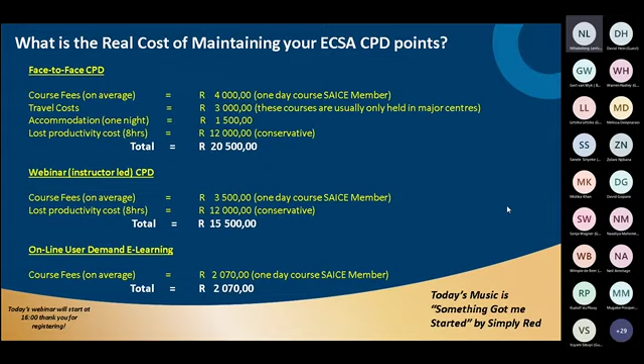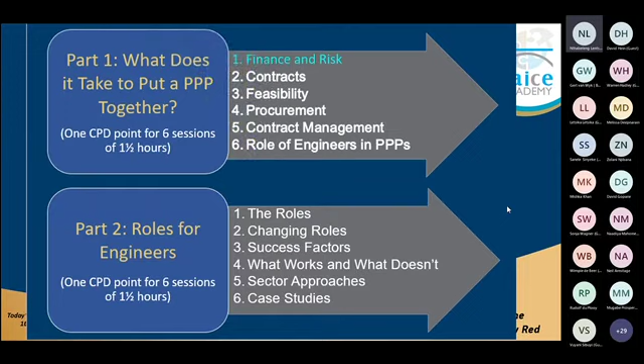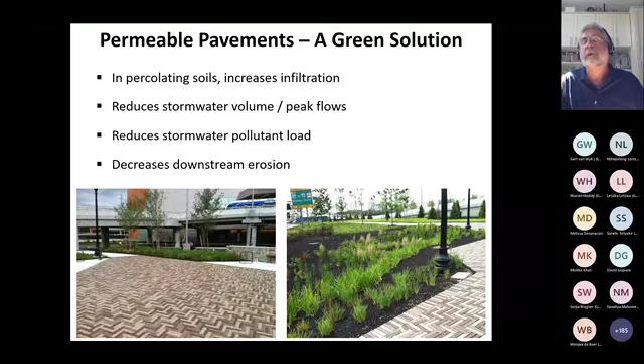That photograph you see there is from Boston Logan Airport in Massachusetts in the United States, where they have a number of different systems of permeable pavements around the airport, as well as internal to the airport, in their road infrastructure and parking systems.

It reduces combined sewer overflows. In many areas in North America, we have older areas where we've combined sanitary and stormwater systems, so when it rains, all kinds of nasty things get floating down into the lakes and rivers. We can try to separate those things from happening.

We can help support tree growth, because a permeable pavement system doesn't have the same dense aggregate materials that we would normally use with pavements, so tree roots are able to grow into the spaces a little easier and have direct access to water. A couple of my projects in the US and California have shown improved tree growth and tree canopies, and therefore improved oxygen generation and things like that.

Improving the character of the neighborhood - lots of signs go up talking about permeable pavement systems and what we're doing to help infiltrate water, and all of those things are looked upon very positively.

General components of the paper - I should mention briefly how I'm going to go through this. I'm going to give a basic introduction of permeable pavements; some of you may have seen some of this already. I'm going to get into a little bit of the design aspects, and talk about a design application called Permeable Design Pro that has recently been developed for use now in South Africa. Then I'll talk about a little bit of construction and maintenance activity - all the key components to help ensure success in designing and building permeable pavement systems.

Basic components of them - they're like any other pavement, except that we're using different materials as support for the pavement structure and the loads we apply to them. We are using open graded aggregate materials, and sometimes other things like plastic boxes to create a larger ability to control water in the pavement structure. We use open graded base and sub base, and open graded bedding layers for the pavers. The pavers themselves, while solid concrete materials like we'd build any other paver, have wider joints, and we no longer put sand in the joints.

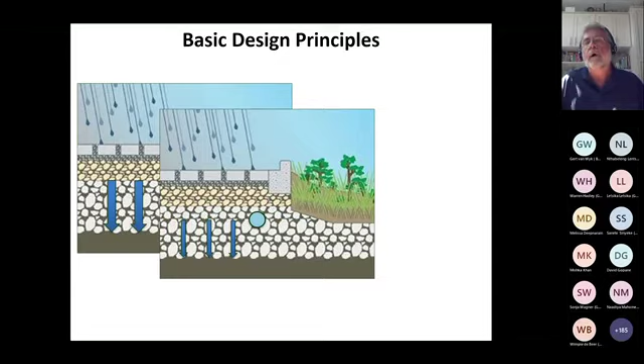At some point we don't want it to overflow the pavement, so we put in a drainage system that allows water to be removed if it can't get into the ground system. This is a very popular design process in areas where I am. The water in the pavement builds up to an outlet, and that outlet takes the water to a stormwater pond, a ditch system, or wherever.

The last design process is basically a no infiltration design. In this design, we cover the entire permeable pavement system in an impermeable liner that will not allow water to go through it. There are two primary uses of this type of system.

One is to save water and store it. We keep it in the pavement structure, typically putting in a cistern or some other larger storage area. We move the water into that cistern, then pump it out and use it as gray water, plant water, or for other sources. Some places are actually storing that water for reuse for human consumption.

The water is then cleaned, of course, in areas that have very small amounts of rainfall. The second use is primarily for situations where we have gray or brownfield developments, where we're redeveloping something that may have contaminants in the groundwater, and we don't want to add water going through that.

So we're basically separating the permeable pavement system from the subgrade below, so we're not increasing flow that would move some of those contaminants to another location. I see a lot of these in brownfield developments in the UK, for example.

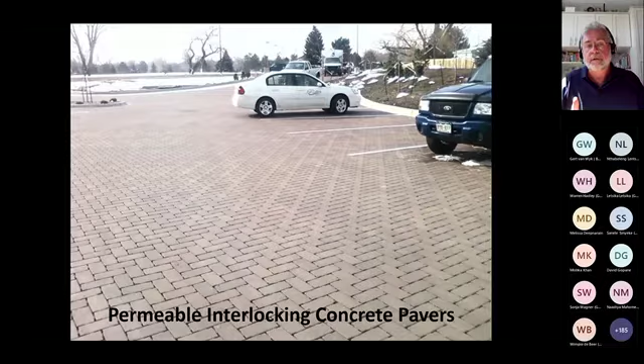We see this used in parking areas and roadways, especially in Europe, which has had much more experience with permeable pavements than we have in North America. We're starting to see a lot more roads in North America being built with this.

There are major advantages in terms of construction, because we no longer have drainage systems under the roadway with piping going to catch basins and pipe systems removing water to a stormwater pond, for example. Construction is easier to facilitate, and we don't have trenches that could potentially settle, so contractors love doing this.

We basically infiltrate all of the water through the pavement and then deal with it once it's in there, whether we infiltrate it or take it someplace else. Roadways and alleyways, as you see here, are a very common use.

This is a project I did back in 2015 in California, in the San Francisco Bay. This was an existing roadway that we reconstructed. We kept the curbs and sidewalks, and excavated the old roadway out of there.

We prepared some berms, which I'll show you later, to control water because this is on a slope. And then we built a permeable pavement system. This was primarily done by this particular city in Berkeley, California to improve water quality potentially in the San Francisco Bay Area. A small contribution at the beginning, but as you build more and more, you make larger contributions.

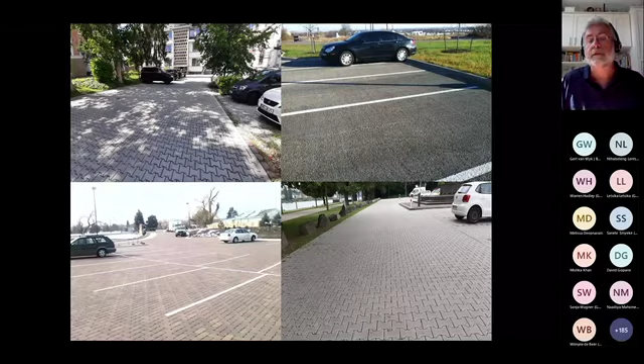The top right is a porous asphalt system, again close to where I live. This is from a botanical garden near where I live, doing sidewalks and alleyways. The left side is from Florida in the U.S., Richmond Virginia, and this is in Longmont, Colorado. The one on the right side has been there for 10-plus years.

I was involved in Colorado Springs. They have regular pavers for the sidewalks, and permeable pavers between the tree pits, so we get water infiltration to water the trees, which is also quite good for the trees. Driveways and houses -- we get credits on our water bills when we have permeable driveways in our house. We get penalized for having hard surfaces.

The roof of my house, for example, I'm penalized. All of the water that lands on the roof goes down the downspouts into an underground infiltration bed beneath the foundation of my house, because we get all our water from the groundwater. So no water leaves my property.

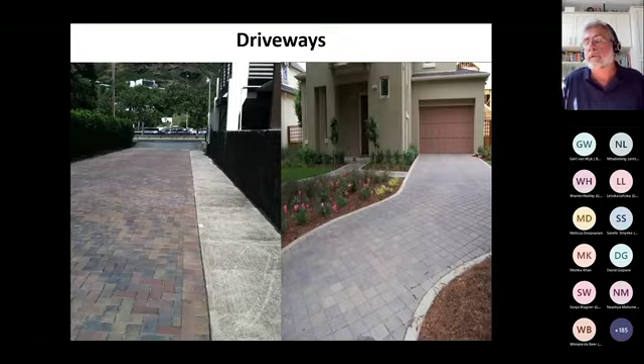So we get credits when we have permeable driveways or sidewalks or decks behind the house. I've also got water barrels to reduce the amount of fresh water we use. Those are very common uses.

Where my wife takes the cat, this is a veterinary place. The driveways -- all of the areas around this property drain onto the permeable driveway and then get infiltrated into the ground. We see them at schools and universities too.

This is from Portland, Oregon. It's been there for 12, 14 years now, I think. I was involved originally when this was constructed a long time ago. So lots of applications in lots of different places around the world, certainly.

Keys to a successful project. Some of the things I'll talk about are ensuring we have success in building our permeable pavement system. Ultimately, it starts with carefully considering the conditions of our site, potential limitations, things we can use to remediate, and potential risks associated with building a permeable pavement and having it not function properly.

We do two types of design. We do pavement design like we normally would to handle vehicular traffic, very similar to conventional pavements. And then we have hydrologic design, combining the water flow -- how do we get water into the pavement? Where is it coming from? How do I move it through the pavement and into the ground? Do I get it into piping systems, or move it somewhere else? All of these things are very important at the design stage to ensure success.

We need very clear, precise specifications. All of the industries typically have some guidance in terms of specifications for permeable pavement systems -- those that build asphalt, concrete, pavers, bricks, or grids all have some guidance. Those have been developed over many years of experience, trials, and improvements in how we build them, so it's really important to have a good set of rules for the contractor to follow.

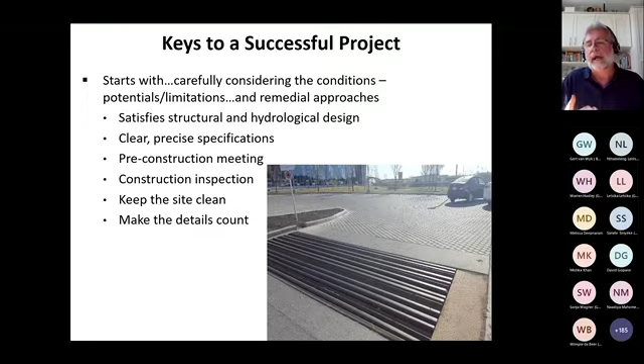Having proper construction inspection, like any pavement, is important. Keeping the site clean, I've already mentioned, and ultimately it's the little details that really count to ensure we're going to have success. Some of the basics of permeable pavements.

Number one is that we have pavers that can be constructed of various thicknesses - 6, 8, 10, 12 centimeter, even bigger. 6 centimeter pavers are something we only use for pedestrian applications; we will never drive a vehicle across a 6 centimeter paver. 8 centimeter is our minimum recommended thickness for ability to develop shear resistance between the pavers so that loading is transferred from one to another, and also for structural capacity. So typically 8 centimeter minimum for vehicular pavements.

David, we've lost your sound. Uh-oh, you hear me now? Better, yes, thank you. Okay, sorry, apologies.

45-degree herringbone is important for stability of the paving system itself. 90-degree herringbone possibly as well, but these are the patterns of pavements we've learned are more stable under vehicular traffic. There are so many different kinds of pavers, and different ones will provide a little bit different stability than others, but typically it's the laying pattern and the jointing that provides most of your structural capacity.

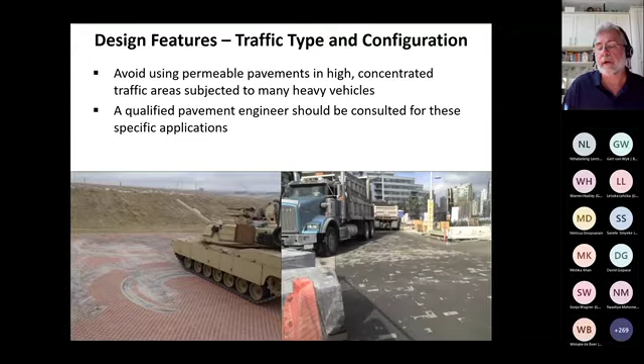Design features - we need to know about traffic type, configuration of the vehicles, what kind of vehicles we're designing for. Both pavements in the pictures - on the left is an M1A1 Abrams main battle tank pavement I designed in Colorado Springs; on the right is the Olympic Village in Vancouver. This one was built so construction traffic was using it at the end and we didn't like that, but ultimately they were late for the Olympics so we had to make some compromises. We design them for the intended traffic and what they are. Most permeable pavement systems are designed for light vehicles, occasional heavy vehicles - a garbage truck once in a while, a school bus - and those are relatively straightforward. If you're doing anything like these two photographs, find yourself a decent pavement engineer who's done this before and understands developing permeable pavement systems for heavy vehicular traffic.

So we want to prevent things from getting washed onto the pavement as much as possible, coming from trees above, potentially. Some of this stuff breaks down and might clog the joints, and then we have to do some maintenance to reinstate the permeable pavement system.

So site characteristics are really important to decide where and when you actually build the permeable system.

So for site design, this is the Environmental Water Resources Institute book from the American Society of Civil Engineers, called Permeable Pavements. I was the editor of that, and I'm currently a reviewer of the majority of the chapters as we update this book. It's got great guidance in it in terms of checklists, for every aspect of the design, construction, and maintenance activities.

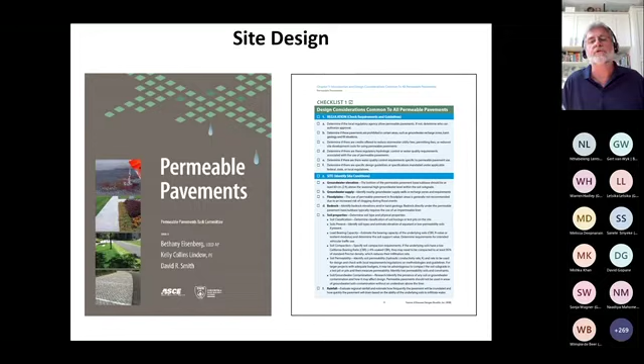For things like overall site characterization, we consider the location where we're doing this. Why are we doing this permeable pavement design? Are we doing it to clean water? Are we doing it to carry water away? Are we doing it to infiltrate water? What is surrounding our area? What is the hydraulic conductivity of the soils?

What kind of risks are we taking, and how do we at the design stage apply risk factors that discount the amount of infiltration into the ground, because we're expecting some contamination? We design for that right away up front, at square one—reducing the allowable infiltration into the ground. It will infiltrate faster until sometime 10 or 15 years from now when it may slow down. So we account for that.

Are we having water run off the surface? What kind of capacity do we have? How much water will pond on the surface, maybe in a very high storm? I'm doing some alleyway designs in Texas right now where it's fine for everything but a 100-year design storm, where we may have about 20 millimeters of water ponding on the surface for 40 minutes during a hurricane basically. We have criteria for all of this to make this happen. And then, how long does it take the water to drain out of the permeable system?

Geometrically, continuing with that: do we put in subdrain systems to carry water out? Do we target water quality enhancement? Do we detain the water for a longer time to let gravity filter out some of the contaminants potentially? We put sand filters in some of our permeable pavements to actually do what a water treatment plant would do, filtering contaminants out of the water stream, because we don't want them where the fish are. We'd rather have low-level contamination in the permeable pavement area than let it roll right into the cold water stream. And then we consider potential failure areas and mechanisms, like edge restraints and overloading due to heavier vehicles using the site.

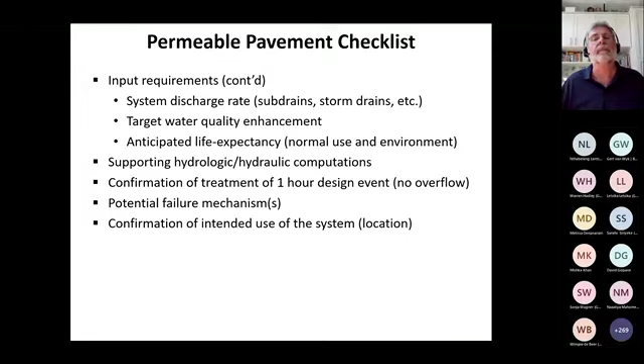Geometrically, we look at all kinds of elements related to the use potential of things like geotextiles, underdrains, or supplementary drainage features that take overflow on the pavement, for example.

Are we going to have subsurface detention of the water? How long are we going to detain it? Usually we design for 24, 48, 72 hours, so we'd like to empty the pavement within 72 hours. It may be different in an area with frequent rain versus very little rain, so all of these things are taken into account. And if you're in a frost area with cold, wet environments, we also need to do things to make sure we don't get frost heaving and things like that happening.

For subsoils, we do geotechnical work like you would with any regular pavement design, except we also include the hydraulic permeability of the subgrade material.

And then we'd like to know where the highest groundwater will be. We typically don't want the bottom of the permeable pavement system to be within 0.5 to 1 meter of the highest groundwater level we have. It kind of defeats the purpose of it.

So ultimately, all of these things are in these checklists. We have a bunch of decision factors. This comes from the ASCE standard, developed by a group of 20 hydrologists and 20 pavement engineers working together on the permeable pavement system and the manual that we have from ASCE.

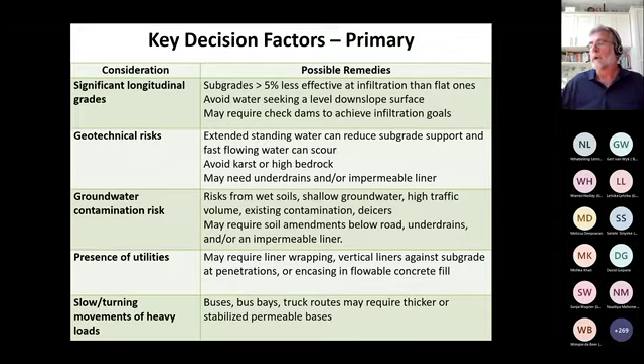So we consider things like longitudinal slope or transverse slope. We consider potential for contamination from spills, for example. Are utilities present near the pavement surface, and do we have to protect those from water? We look at volumes of water, multiple design storms, and multiple storm events that may be back to back.

Again, all of these things are dealt with at the design stage. Do we have complex geometric conditions, like water shedding off of a building roof, coming from a soccer field pitch, a parking area, or a non-permeable surface, et cetera. So lots of different considerations that we use.

And I mentioned depth of water table and chemical spills as well. We have tools for some of this that were developed as part of research programs I was involved in with the National Cooperative Highway Research Program in the United States. And so we have spreadsheets that are basically risk matrices.

And engineers like spreadsheets. So we develop criteria, we weight the criteria as to how it may positively or negatively affect the permeable pavement system, and then we rank it. We put criteria A, B, C, or low, medium, high, and we answer the questions, fill in the blanks, and at the bottom right, you get a go, no-go type approach.

So if it's red, it means don't do a permeable pavement here. If it's green, it says yep, do one here, no problem at all, the risks are low. And if it's yellow, it's, yeah, you could consider it, but maybe you should consider your risks.

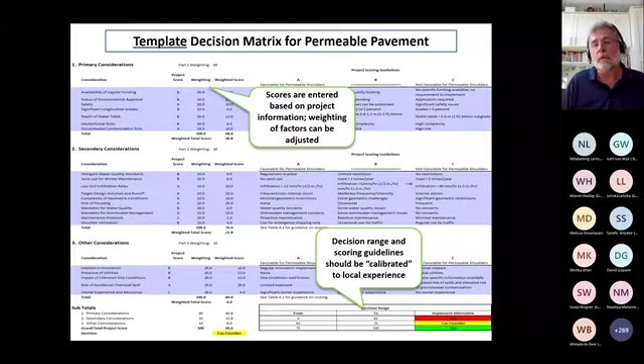So we look at potential sites, we evaluate them. The criteria is not always the same—it's different in a municipal environment than it would be in a recreational environment or something like that. So we look at things like underground utilities and when they were last replaced.

And some of the elements are the same as you'd do with any normal pavement design, but in some cases we want to make sure we're dealing with permeable situations. So we look at a variety of different road systems. This came from an actual project, and this Alston Way was the road that was built at the end of the day. It helps give logical criteria to evaluate risks associated with permeable pavement systems.

So let's get a little into the design aspects of this now—permeable pavement design. There's lots and lots of guidance related to permeable pavement design around the world. I've got some here from the US, New Zealand, the UK, Canada, some US states, industry associations like the Interlocking Concrete Pavement Institute, and ASCE. This has gotten substantial—I could give you pages and pages of these things related to permeable pavements. Many organizations on a state, municipal, or city level will have their own guidance related to permeable pavements as well, and conservation authorities too.

We have two sides of it. I'm going to go through the highlights of the design process here, and show you how we do it with the software application, Permeable Design Pro. So we have two sides of our design: on the left-hand side, we have a structural analysis, and that's very similar to what we would do for any pavement design.

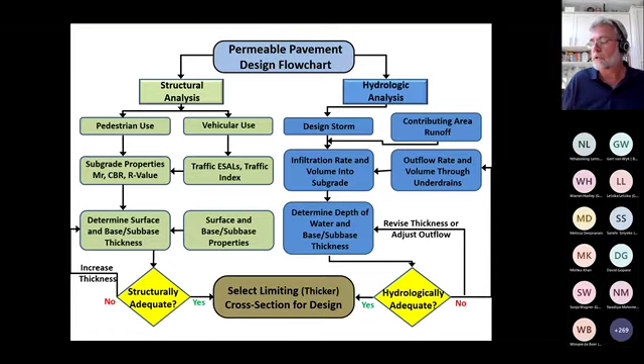The primary method used in North America is the AASHTO method, the American Association of State Highway and Transportation Officials. It has been the standard pavement design process used by most North American agencies and others around the world since the 1960s. That's being changed now towards mechanistic design, but we'll talk about that in a moment.

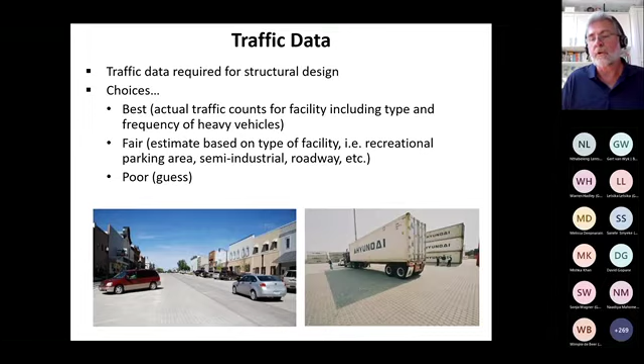So what does it need? It needs traffic data - we need to know what traffic is using our pavements. Basic information includes types of vehicles and the axle loads on the vehicles, how much weight is on the vehicle. Ultimately, the better the information you can get, the more precise the design can be.

A standard axle load is called an ESAL, equivalent single axle load, and it's not a linear relationship, it's a power 4 relationship, which allows me to convert the actual loads on the axles, whether at, below, or higher than the standard axle load, into a common design numerical value. That's what's called the ESALs, or the design ESALs of pavements.

The design ESALs are usually estimated based on the vehicle types we have, depending on whether they're a local delivery van or a dump truck or an 18-wheeler type vehicle that transports major goods between major city centers, for example, or on the highways. So we need some basic information about our vehicles.

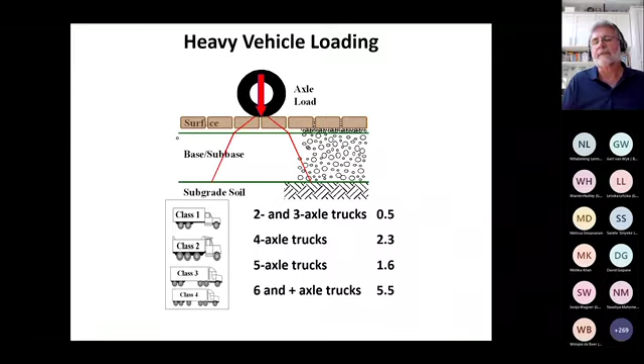We also need some basic information about our materials, and particularly the ground on which we're building them. Virtually all pavement design procedures use resilient modulus, which is the strength of the subgrade material, as the input component for the pavement design procedure.

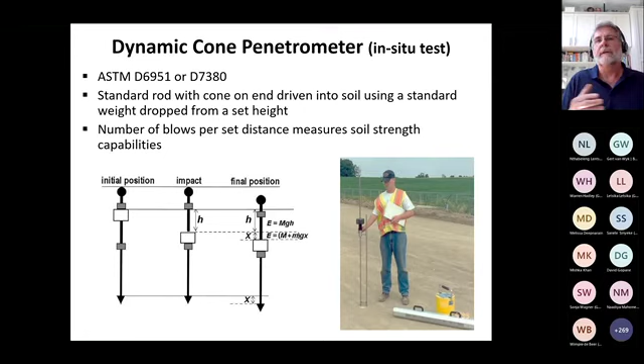So number one, we need to know its strength, and again we revert to resilient modulus values. If you're using other methods of characterizing it, typically they're converted to resilient modulus anyway.

And then we add one more thing: the subgrade infiltration rate - how much water can we get into the ground. This is usually done by a single or double ring infiltrometer.

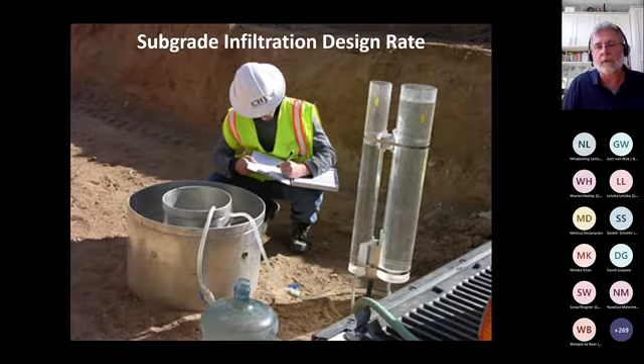You can see some of the new site here where the testing is being done in situ, and the permeable pavement is going to be built on top of this. In California, we excavated trenches in the road that we were going to remove, and we literally did infiltration tests directly in the road infrastructure before we removed all of this material during construction. This allowed us to get a good handle on the infiltration rate in situ in this reconstructed road location.

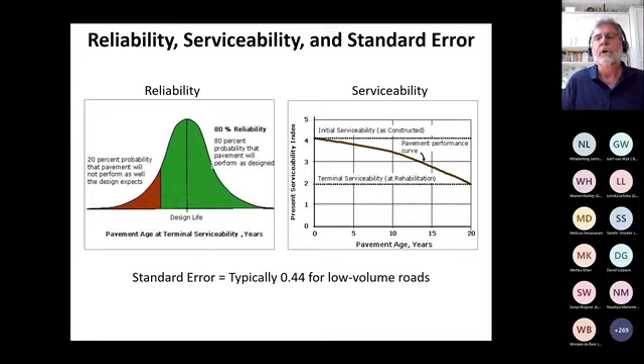We then apply some safety factors, what's called reliability or serviceability index, that are used in this AASHTO design procedure to basically come up with the input values we need for a structural design. So we need to know how many ESALs it's being designed for.

In terms of ESALs, to put it in context, my driveway would probably be designed for 50 to 100 ESALs over its life. The roadway in front of my house is a low volume local roadway - it would maybe be designed for 50 to maybe 100,000 ESALs. We get some garbage trucks, some recycling vehicles, a few construction vehicles, things like that.

The collector that takes from my street in front of my house to a larger arterial road would probably be designed for 1 million, 2 million ESALs. The arterial road, the major roadway that has 4 or 6 lanes that moves traffic from my subdivision, will be designed for 15 or 20 million ESALs.

If you get into highway traffic, you could be talking 50, 100 million ESALs, something like that. Most permeable pavement systems are designed for less than 1 million ESALs. In places like the UK, they've been designing them regularly for 10 million ESALs, and so you need different designs. I know they've designed stabilized bases in Belgium, Austria, and Germany as well, so you can design them for heavier traffic. But the majority are typically less than 1 million ESALs - low volume residential roadways, down to parking lots and things like that.

So we have subgrade modulus, we have factors that relate to smoothness, and we have some statistical reliability factors as well. You plug these all into a big equation, which I won't show you, and you get a strength value of 63 millimeters. So I need 63 millimeters of strength, called the structural number.

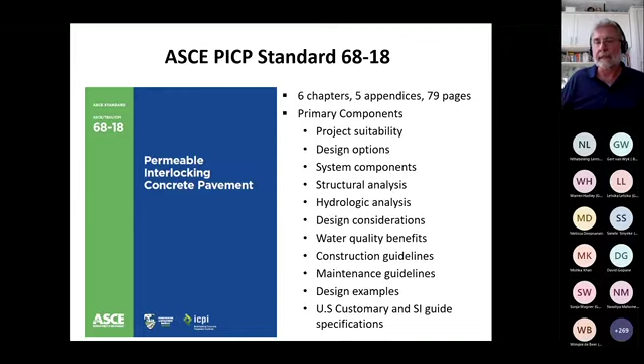This has been superseded in North America with what we call ASCE standard 68-18, which was developed to move into a more mechanistic design process. In order to do that, some testing was needed to look at the long-term impact of vehicle loadings, ESALs, on pavement structures. As part of developing that standard, we commissioned a research study at the University of California, which has an accelerated load facility device actually manufactured in South Africa, of all places. That accelerated load facility was used to test pavement structures.

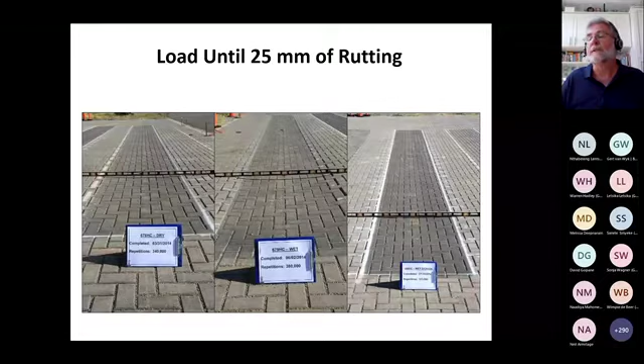Through that testing and the development of rutting - our failure criteria for wet and dry pavements - we were able to develop design tables and a design methodology incorporated into the ASCE standard, now based on mechanistic design. So we had ESALs, axle load spectra for traffic, rutting as our failure criteria - 25 millimeters of allowable rut depth. We can choose 50, we can choose 75, whatever we want, but ultimately we've simplified it by running the analyses and developing these design tables, which are what's included in that ASCE standard now.

So we did not go through the great detail of all of this, and I'll show it to you live in the software in a minute.

Ultimately, what we need is to know how many days the subgrade in a permeable pavement will potentially be wet, because when the pavement is wet, the subgrade is wet and has its lowest load carrying capability. When the pavement is dry, it's able to carry more loads. So the number of ESALs it can carry when dry is much higher than when it's wet. How do you define wet? Wet means there's water potentially ponding on the subgrade surface.

The subgrade, if it's sand, may be infiltrating water quickly, so very rarely is it wet - it will always drain through quickly. But a clay subgrade may have water sitting on it. So we figure out how many days, due to the rainfall distribution during a year or multiple years, there could be water that cannot get into the ground. That's considered to be what's called a wet day - we look at the number of days when there's standing water.

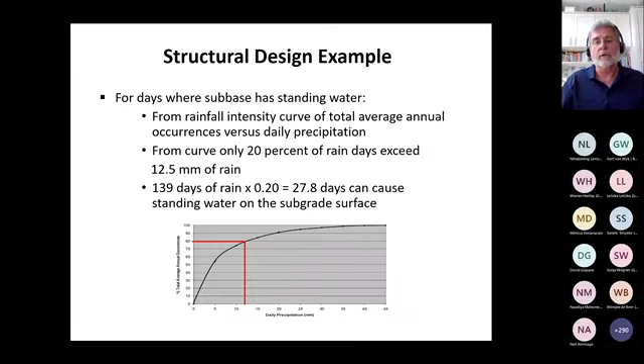We take the rainfall distribution in an area. We look at 365-day average rainfall numbers for each day, then we sort it from the highest to the lowest. And then we basically use the location to determine how many days is it potentially going to be wet.

And again, I'll show you how the software does it. So this is a design table where we go into the table to come up with numbers.

So for example, this is 200,000 ESALs, and we have 10 to 29 days when the pavement could be potentially wet. The subgrade support capability when we have wet subgrade, in this case, is 24 megapascals, which is pretty soft clay material. And when we run it through our model, we come up with 315 millimeters of subbase. All of these pavements have at least 100 millimeters, 10 centimeters of base. So in this case, we've got 315 millimeters, or 32 centimeters, of subbase as the answer.

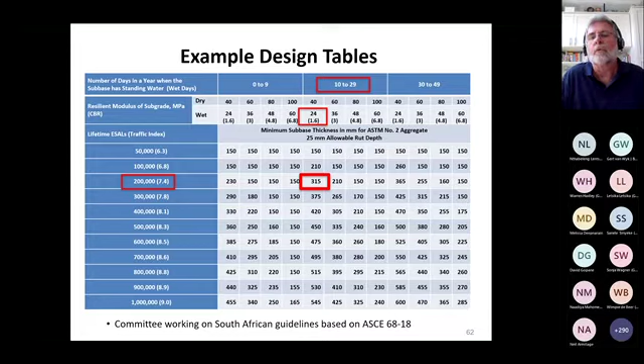So that's how we do our structural design for the permeable pavement system. You can go to the standard and use the standard itself, which you see a picture of on the left. That standard has tables you can use to do exactly that design. You need to know what the wet days are, your location, and things like that.

So we've simplified that and incorporated it into a software system called Permeable Design Pro. It was developed in 2010, or actually 2009, so it's been around for quite a while. It was developed by the industry, the interlocking concrete block pavement industry, to assist designers, particularly landscape architects and those not so technical on the engineering side, to be able to do permeable pavement design.

Up until 2018, the only design process in there was the AASHTO design process. Once ASCE 68-18 was developed, we then took that methodology and incorporated it into the Permeable Design Pro program. So it is used extensively for permeable pavement design, and it integrates structural and hydrological design.

Stormwater databases exist, and it started out only in Canada and the United States because this is the primary territory of ICPI. So we took the climate models for Environment Canada and for the National Oceanic and Atmospheric Administration in the US, and made it so you could pick cities out of the Canadian provinces and American states. You select it, and you've got the rainfall distributions.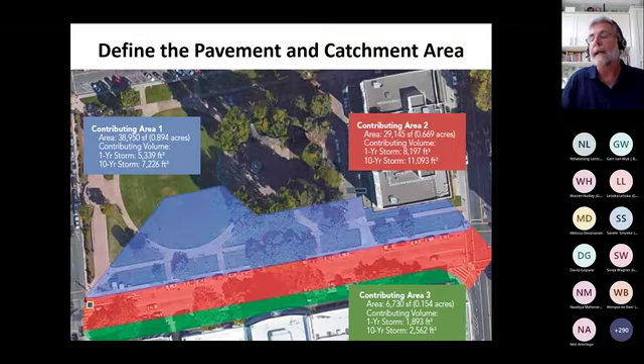And we characterize those in Permeable Design Pro by calling them contributing areas. So we say, what's the length and width of our permeable pavement, or just the area of our permeable pavement? So we know what the infiltration area can be, and then all of the supplementary areas that will shed water onto the permeable pavement during 24, 48, whatever, 72 hours. We characterize those areas by how big they are, how close they are to the pavement surface, and what the surface is - is it hard, a concrete sidewalk, or is it a soccer pitch, a grass field, or a playground?

And we characterize the roughness of the surface. When water falls on concrete sidewalks, it will flow quickly to the permeable pavement. When water falls on grass, some of it will evaporate and some will move to the permeable pavement, but at a much slower rate.

So what we want to do is develop complete water balances for our design. And that's what Permeable Design Pro does.

Subgrade, we basically have default subgrade types in the system. Everything you see in yellow is a default from the system. And so you can select one, and we encourage people who are doing preliminary design to go ahead and select one of these types, because we have information about its resilient modulus, its permeability, its density, all of that kind of stuff stored in the system.

But if you're actually doing a detailed design, you should do your own physical testing of the materials, the subgrade, the properties of the material, standard lab testing, and then enter that subgrade into the database.

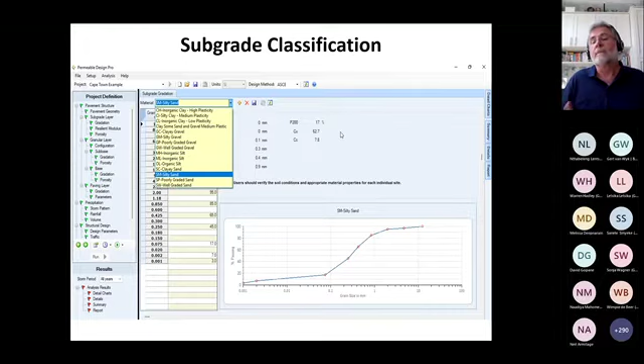So in this case, you see a list of soil classifications. And in my database, I have 20 or 30 different projects that I've developed the input parameters for, for those specific locations or areas, and they stay in my database forever. So it's basic information about the soils.

We need to know about the infiltration rates of the soils and all of the other materials - infiltration rate through the surface, the bedding layer, the base, the sub-base - because we have to get the water in. And if we can't get the water in, we can have the most permeable system below, but we still need to get the water into the surface as well.

So what we do is identify the infiltration rates, and then we actually factor them down. We put a safety factor on, usually a factor of 2. So we reduce the permeability of the soil by a factor of 2, assuming you're going to get some dust deposition and things like that that will reduce the permeability of that particular material.

So the subgrade properties, other information is bulk density, specific gravities, porosity, permeability information, and then we can have a long-term permeability. We have a safety factor at the bottom which says decrease the permeability by 50% in the long term, and start with that today when we build it, because we think we're going to get some clogging in the subgrade, a reduction in permeability potentially happening.

So we have resilient modulus information, we can have CBR information, we have lime rock bearing ratio, we have DCP, we've got other things you can enter to help quantify that material.

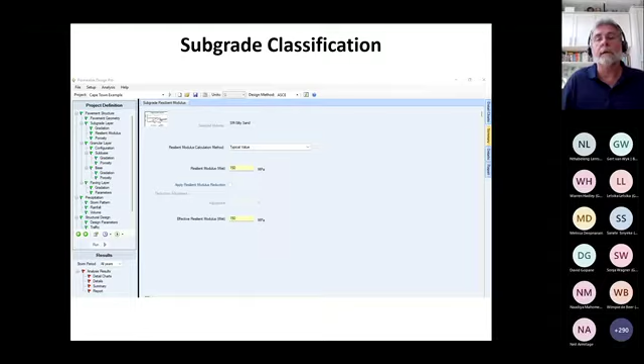And then we can also apply a long-term reduction in the modulus of the subgrade as well. So if we think it's going to be wet all the time, 365 days a year, that's taken care of by the ASCE method. But if you're doing the AASHTO method, you can discount your subgrade strength by whatever you want - 20%, 50%, whatever - to again apply another safety factor.

Granular base and subbase layer - we typically consider the surface, the pavers, and their bedding layer as one component, so we use a composite modulus of those two layers and assign that to the paver system. The modulus you assign is based on the shear capacity of the pavers. If you've got wider joints, you'll have a lower modulus than with narrower joints.

What kind of materials are you using in those joints? Are you using limestone, which is very soft and prone to breaking down, versus granitic materials or other kinds of gabbro, metagabbro, different kinds of rock materials? So it depends on what you have in your area.

And then the granular layers we combine into a base and a subbase, and we typically have a minimum base layer. So even if you're building a walkway, you're going to put some granular base supporting your permeable pavement system and acting as a storage reservoir for water as well. So those are the systems.

And then from that, we basically need to know what's the grading limits of that material - what is the highest and lowest gradations of those materials. We can enter the grading limits on this screen you see here. It'll select either the mean percent passing, or it will take the lower and higher limits of gradation and divide by 2 to give you the mean for use in design purposes.

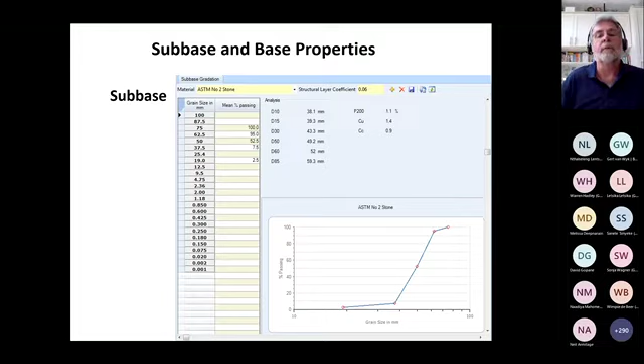I looked at some of the aggregates available in South Africa that were provided to me by Bozen and Gert, to determine if they're somewhat similar to what we use in North America, where I have most of my experience, and made recommendations on which kind of aggregates should be used for base, subbase, and bedding layers.

Typically manufacturers will look at the grading or opening spaces in their permeable pavers and give guidance on which bedding chip and jointing aggregate to use. Several were given to me as examples, so I'm showing what I looked at. The software itself has what we call choking criteria.

The software goes through and looks at each of the layers as they fit on top of the layer below, to make sure the layer you place on top isn't too fine and sinks into the layer below. There are several criteria used by the U.S. Army Corps of Engineers for dam construction that we incorporated into the design software. You can enter whatever aggregates you want, and it will evaluate them and tell you whether they're good for choke criteria.

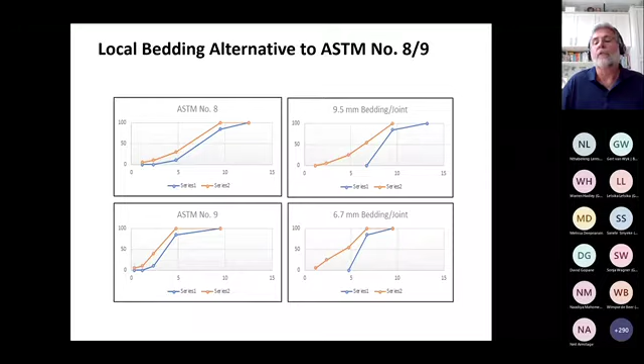A couple of these layers were debatable, close calls—like we have a minimum of 5 and it was about 3.6. So it's close, and we defer to local experience to determine if you have some loss of aggregate into the layer below. Then there's basic information too, like bulk densities, porosity, and things like that for the aggregate layers.

The software allows databases to be built up with this. So if you're using something in Cape Town different from Johannesburg, you could have databases for each location and use local aggregates unique to those locations, calling them whatever you want. I started just calling them SA 1, 2, 3, 4, 5—South Africa 1 through 5—in my database, so I can call them up and use them again in the future.

Traffic information is based on ESALs. These are the number of vehicles, the design life, how long you want it to last, what percentage of heavy vehicles you have, how many ESALs per vehicle, things like that. We still use ESALs, and we have basic categories for low volume applications like parking lots, walkways, and trails.

We have category 1 for just passenger vehicles, category 2 for passenger vehicles and light trucks, and category 3 for occasional heavy vehicles. The software will give you a suggestion for how many ESALs you should design for. If it's more than that, you need more details, which you provide on the left.

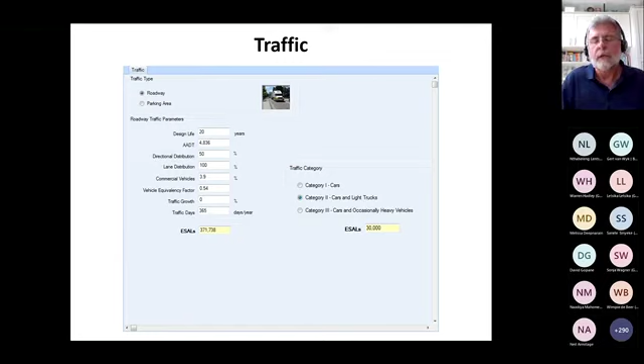The ones you provide by ESALs we convert to an axle load spectra. I won't go into the background details, but we use something a little different for the ASCE method, though we still use these as the input values.

There are AASHTO design parameters required—these are safety factors based on smoothness. One of them is called the present serviceability index. The software gives you details and help menus explaining all of that; you push the F1 button and it pops up and tells you how to calculate this and how it works.

So anything in the entire software system, hydrologically or structurally, press the F1 button and it gives you a help menu. It tells you about what an ESAL is and how to calculate it. Some of these graphics you've seen are in that help menu as well.

Structural design thicknesses are then calculated. We calculate those values based on the AASHTO methodology, based on that input, as well as for the ASCE method.

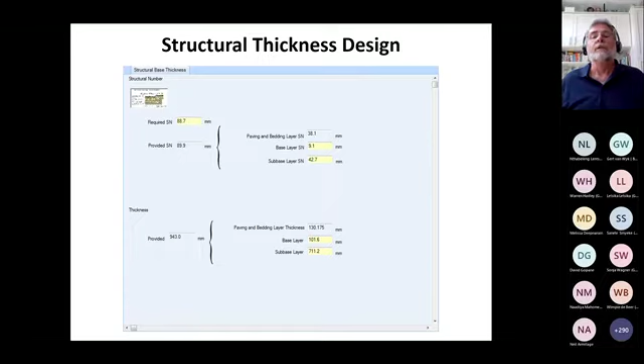So let's go to South Africa for now. What we did is we sat down with the South African Weather Service. They put us in touch with the appropriate people. We sat down and looked at the database information that was available publicly, and then what was available privately from the Weather Service. We determined that it was most appropriate if the Weather Service would process that data for us.

So that was paid for a number of different locations. We basically have design storms for 12 cities in South Africa that give you the 2, 5, 10, 25, 50, 100-year design storms, and it gives us all of the daily rainfall data. We've also developed temporal storms, time-based distributions over 24 hours for South Africa. These are temporal curves that show what percentage of rain on the vertical axis falls during what time frame in hours on the horizontal axis.

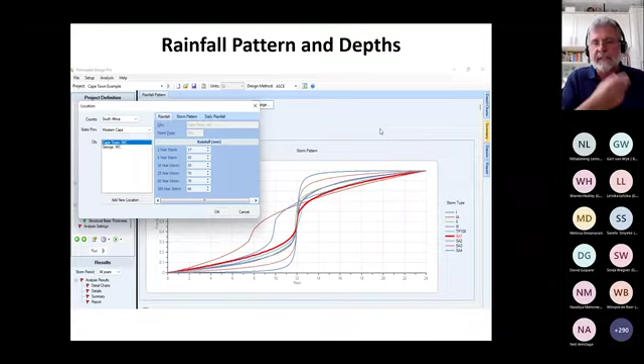That data was then synthesized and brought into the Permeable Design Pro system. On the right, we have storm types, 1, 1A, 2, 3, and those are North American. The TP 108 is one from New Zealand, and the ones below are South Africa 1, 2, 3, 4. On the left-hand side, you can see some of the data that's in the software showing what was used and how it's organized.

We then have rainfall patterns and depths. This is Cape Town. I'm just pulling up the data information from the software that shows the basic information of where this came from. We can add new climate data if you wish. There's a feature to allow you to do this, but it's painstakingly slow if you're doing this for 365 numbers in days. So it's better that someone with access to the software can do this, aka me.

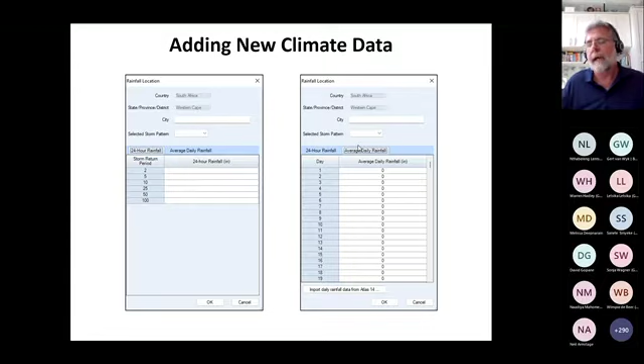Then I can simply suck it into a spreadsheet and populate the database. So if there are other locations in South Africa that are desirable, and you can't find one close to what we've already got in there, there's the ability to add it yourself or to have someone else add it for you. If you wanted to do that, I'd suggest you contact Bosun and they could help you figure out what to do with it.

We have rainfall patterns, and all of this was developed into rainfall patterns for South Africa. This is an output analysis that shows what kind of rainfall we get at different locations, and also how the structural design works in terms of the ASCE system. It basically takes all of those tables in the ASCE standard and fits them into categories, so if you've selected ESALs that are slightly higher, it will bump you to the next highest category to increase the thickness of your subbase.

All of the ASCE is based on 8-centimeter pavers, a 50-millimeter bedding layer, and a 100-millimeter, 10-centimeter base, and then it calculates the subbase thickness, which is the structural capacity, and then the hydrologic capacity is also evaluated.

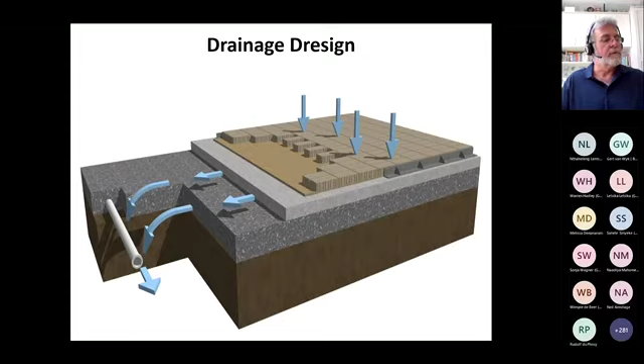All right, so drainage design. How we do this is we basically bring everything together in terms of drainage design to figure out the water balance. The system itself will go through and evaluate every 6 minutes, and in some cases 1.2 minutes, so a fifth of a 6th minute, for every hour during a 24-hour, 48-hour, 72-hour time frame, developing a water balance.

So water coming in, water coming from a contributing area, water going through into the subgrade, going through a pipe system. When does it start flowing in the pipe system? What is the slope on the pipe system? All that kind of stuff, and it balances all that for you.

Then you can do some fine tuning of what you want to do. There's a page that says you can assume there's been water left in the pavement from the last storm 24 hours ago, so discount the volume by 50 millimeters because there's still water there. We can say run the analysis until the pavement is half empty or 10% full or whatever, and there's all kinds of other what-if scenarios.

How many pipes do I need? What diameter? Are they smooth? Are they coarse? All of these hydrologic calculations are completed.

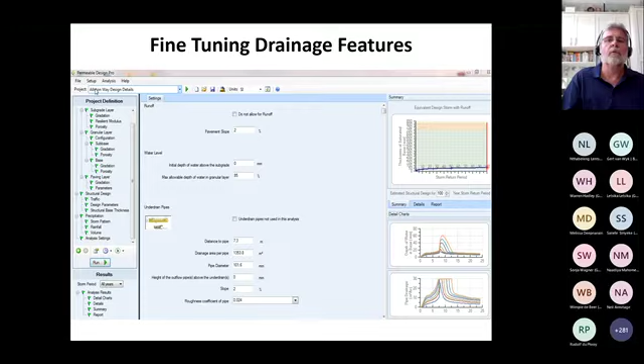Other benefits: when you're finished, this will also allow you to output an AutoCAD drawing of the cross-section you incorporated. So whatever you choose in the design system, in terms of thicknesses, use of geosynthetics or pipes or whatever, it will generate an automatic AutoCAD design that you can copy and paste into your design details or drawings, or shoot to a PDF or put out in an Excel sheet or whatever you want, along with all the other details that are there.

The other features in this system include things like what-if analyses. So for example, I'm designing a pavement and I told it don't get more than 90% full. The light tan area has vertical axis as thickness, horizontal axis as design storm.

Going from 0 to 100. The tanned area on top says design it so that you don't have water exceeding that depth. So never have water in the paver layer exceed it, and let it go 90% full. This particular design is capable of handling a 50-year design storm.

So if the design storm is 60 years, then you're going to have a pavement that's too thin. I can simply take my cursor, touch that red line, and move it to the right, and it will scroll up the thickness of my subbase. So tell me, how thick does it need to be to accommodate a 70, 80, 90, or 100-year design storm? And it will ratchet it up for you. It's a nice feature.

We can also look at things like pipe systems. The graphic in the middle is the intensity of the storm. The top middle is the amount of water that's in the base, how it goes up, the storm ends, and how the water then goes downwards.

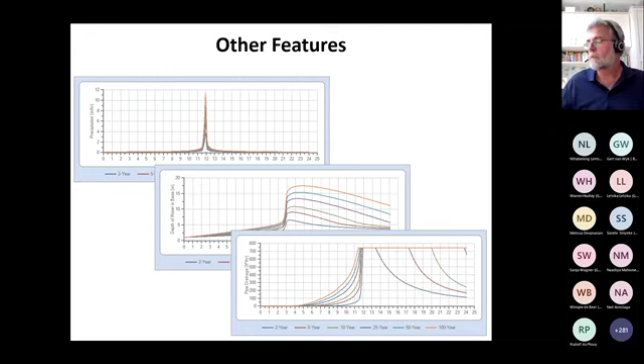So we can do things like design a pavement. This particular pavement I designed has no subdrains in it. It needs 15 inches of pavement structure, and it's only good for a 3-year design storm. So I don't like that.

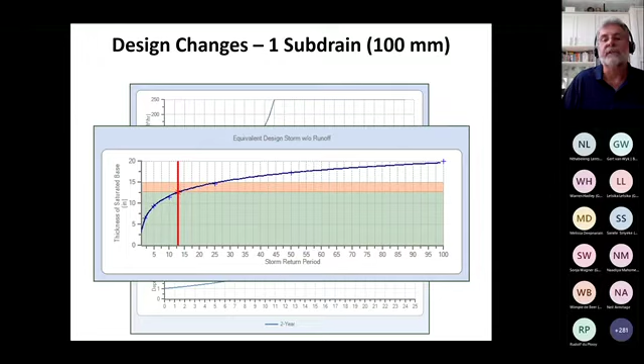So I'm going to go put one subdrain in at 100 millimeters in diameter. What does that do? Well, that shifts the line to the right. So now my pavement structure is suitable for roughly a 13-year design storm. That's still not good, I want to do something more.

So I'm going to put in 2 subdrains, and make them 150 millimeter diameter. I do that, and my line gets pushed further and further to the right. Now I'm up to almost a 75-year design storm. I can still increase the thickness to get to a 100-year design storm, but at the same thickness I was able to change the hydrological components of it.

As I mentioned, all you've got to do is move that red bar back and forth, and when you move it, it will increase the thickness of your pavement and change the design storm, changing the thickness of your pavement to make it compatible with your goals.

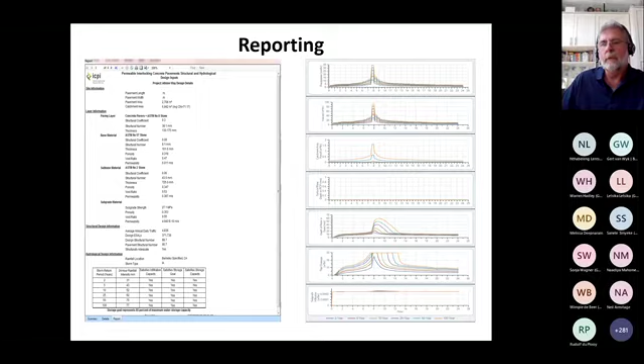Reporting in the software has lots of reporting abilities. You've got all of the detailed hydrological information, what you selected, all the criteria you picked, the subdrains you picked, the diameter, what slope they're on, all that kind of stuff. All of those things are exportable, copy and pastable, output reports to Word, Excel, PDF, whatever you want, with access to everything including all the detailed calculations.

We spit out literally for every design storm - 2, 5, 10, 25, 50, and 100 years - every 6 minutes, or your choice of time interval: 6 minutes, 0.1 of an hour, 0.5 of an hour, every hour, whatever. It will summarize them all and spit them out into a grid you can copy and paste into your own hydrologic software if you want to check things.

Or I do it a lot to find out when there may be water ponding on the surface, or whether I need to put in a bigger subdrain and all that kind of stuff.

So all of that stuff is available. This is where you can get it: www.permeabledesignpro.com. There's a website where it can be purchased for US $190.

If you are having issues or whatever with that, I encourage you to check in with some folks at Bosun that can help you out to make this. They are fully aware of how this all works in South Africa, because they've been intimately involved in the process of us getting to this point with the software.

Okay, so enough about software. The webinar is also talking about ideal ways to ensure success of permeable pavements in South Africa. I'm going to speak a little bit now about some key construction considerations, because we can do everything in the world best we can to design our permeable pavement system the way we want it to be. But ultimately, if we don't build it that way, it's not going to perform.

This was some of the more difficult things that we ran into implementing these in North America - everybody thought they could build a permeable pavement and they just went off and did whatever they wanted. And there's me shaking my head, saying, guys, you can't do that. Yes, you can do this, and so on.

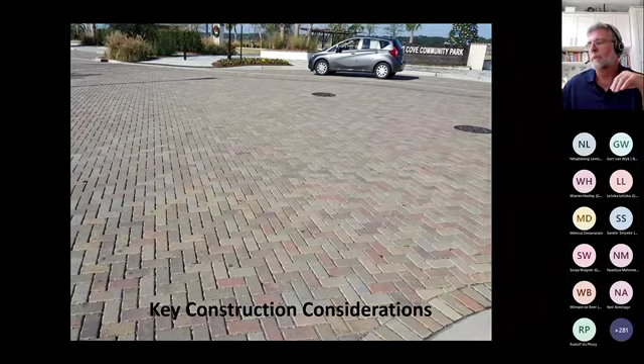So it's not complicated. It is not complicated at all to properly construct a permeable pavement. It just needs a bit more care and understanding of how to do that.

Going back to the EWRI book, we have key construction features. In that book there is an introduction to all major permeable pavement types, there is a design section, and there is an alternative design section covering new and upcoming technologies.

There is an entire section on maintenance, including costs and methodologies and all that kind of stuff. I'll cover some of that as we go through the rest of the webinar today. So lots of good details.

And there's also specifications - guide specifications that you can copy, including actually in the Permeable Design Pro software, there is a location where you can copy guide specs out of it and edit them yourselves for use, which we adapted from the ASCE standard. So the best that we know how to build, we put into these specifications, including densities and all kinds of stuff like that.

So number one, make sure everybody knows what a permeable pavement is. And I don't just mean the people building it, I mean everybody else around it - people that come in and landscape the thing afterwards. What are they going to do with their landscaping materials when they come in, putting a tarp down and dumping their wood chips or mulch, and not putting it on the permeable pavement? They need to be aware of the situation as well.

On-site preparation - we like to see mock-ups, and I do this. I do work for all industries in permeable pavements, and I always want to see them pave a section of porous asphalt or concrete to make sure that everybody understands this.

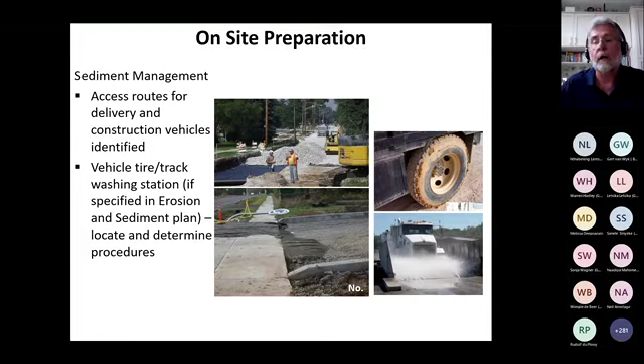On-site prep is basically making sure water runoff is diverted away from the permeable pavement, whether from a barrier, a berm, or a trenched area behind it. We don't want water to run across our permeable pavement system, like you see in the right-hand picture, where it's basically just running onto the pavement. That's definitely not acceptable.

Subgrade prep: ultimately you hear people say do not compact the subgrade. I am a civil pavement engineer, and I'm not a fan of not compacting my subgrade, because you compact your subgrade to provide structural capacity. When you don't compact it, it's subject to potential settlement.

Yes, it will have higher permeability, but if I have a soil that isn't very permeable anyway, I'll build other features into my permeable pavement design so I can infiltrate water off the site, under a grass berm, a golf course, a playground, whatever. I can get water into the ground, but I don't want to do it where heavy vehicles or trucks are driving. So ultimately, I encourage people to compact their subgrade.

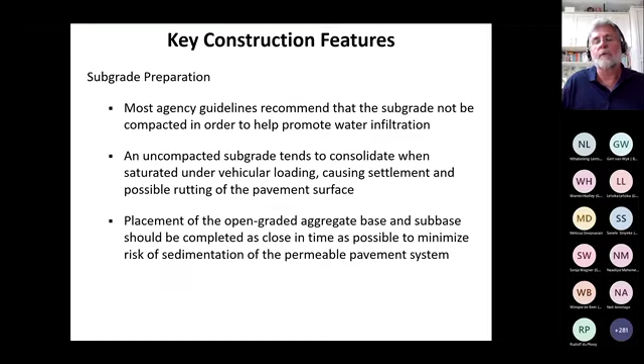The base and subbase should be done as soon as possible after compacting the subgrade, because we don't want vehicles driving all around the subgrade and compacting it unevenly with their tires.

So on significant slopes, more than 3%, definitely more than 5%, we want underground features that are easy to construct and will do wonders for your water balance and things like that.

Use of things like geotextiles and geomembranes — I'm not a fan of these at all, because they're complicated during construction. Contractors screw them up. They don't overlap them, they don't seal them, they do a whole bunch of things, and they're a pain in construction. So I go out of my way not to use them.

But in many cases, especially when you're using water capture, you have to use them. So there are ways to ensure you don't puncture them during construction — we weld the seams together, and all of these things are really important. You don't want to use anything too stiff, because then you can't work with it. Again, we have lots of good guidance in our specifications for this.

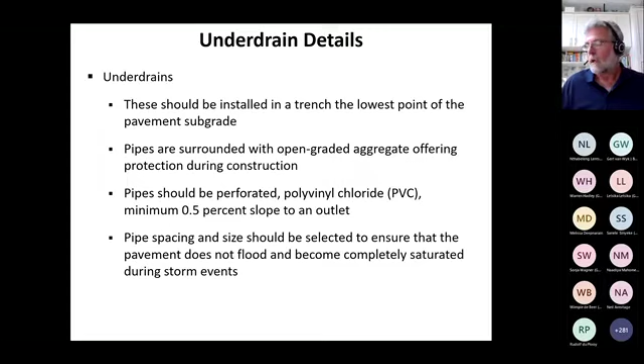Under-drain details — as I mentioned, we put piping systems in, but we don't put the pipes in the granular base and subbase. We actually put them below that. Typically they'll be a big drain tile or a PVC pipe with holes drilled in them, and we slot them into trenches in the subgrade below the permeable pavement.

We put in observation wells — things that let us determine how deep the water is in the pavement, and take samples of water for quality testing, things like that. I like to put mine outside of the permeable pavement.

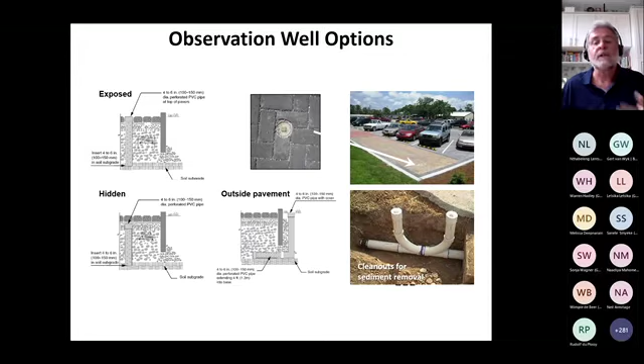We also build cleanouts in some cases, so we're able to flush water out of the system if we have pipes in them.

We want to make sure that the materials we're using are clean. In this particular case, we've got clean base and subbase aggregate. This was given to me by a friend of mine in North Carolina, who ordered aggregate to be washed before it went to his job site. We don't want to wash dirty aggregate dust into the permeable pavement system. So why put it in there in the first place? So we asked for washed aggregate.

He checks that truck coming to his job site by using a water truck, saying lift your bed a little bit, and I'm going to spray water on top. But if it comes out dirty, looking like this, you're going back to the quarry because you didn't wash the aggregate. We don't want to start our pavement off with putting fines material into it. So washing the aggregate is usually a good idea. Of course, that also costs money as well.

Base installation - what are we going to use for those materials? Typically it has to be local. You don't want to be moving aggregates from one place to another. It costs money for transportation, mobilization, for example. We look for local sources. Yes, we recommend certain kinds of aggregates in terms of sizes and quality materials, but ultimately we always source something that's local. And it doesn't have to be the same all the time.

You've got to make sure it doesn't fall into the layer below it, and you've got to make sure it has some decent gradation. A lot of times I sacrifice permeability for gradation because I like to have stable aggregate materials. So I don't like things all rounded, for example. That doesn't make a good pavement structure.

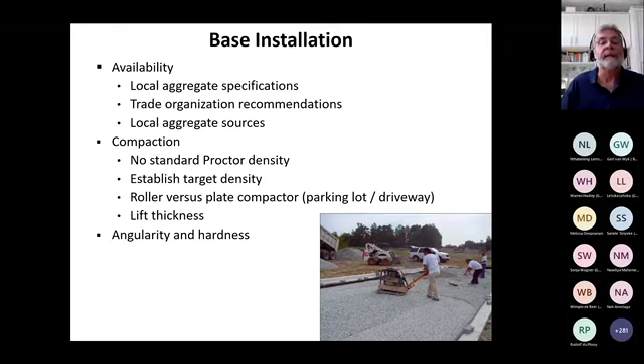And then we also compact it to some target density. We typically do not use standard Proctor density measurements, things like that. We'll specify the rollers, whether it vibrates or not, the type and compaction energy being used, and then we will go out and do a number of passes or build a test strip to ensure it's properly compacted.

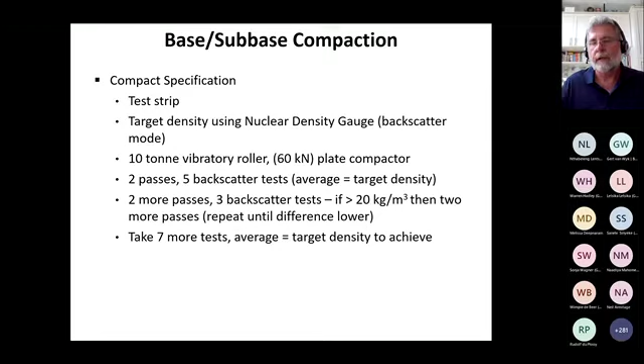We've been doing a lot of work, and part of the construction we did for the ASCE standard was using the lightweight deflectometer to measure the in-situ density after compaction of the aggregate, and the minimum deflection that we will allow. This has been used now in the ASCE standard for 4 years, but the industry has also commissioned some research being done in the US, in Oklahoma I believe. They built a whole bunch of test pads, and they're going to test them all with LWDs. They're going to provide guidance as to what we should potentially modify, and when they do, we'll update the Permeable Design Pro guidance as well.

So this is much more palatable and repeatable than using anything related to nuclear density gauges. And of course, it's much less expensive as well.

Settlements - we don't want this to happen, obviously. Getting a compactor in that corner may be a little bit difficult because we've got our concrete curbs around the outside. When we are laying our pavers, we need to screed the layers to ensure we have a uniform layer across the pavement, no different than we would do conventional pavers. So the bedding layer is an important layer in the entire process.

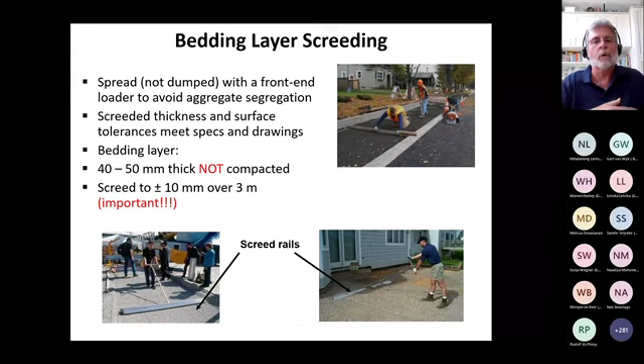I'm screeding a small area using pipes that you basically lay down, and then you pull a wood mold or a screed over top of that to ensure we have a uniform surface. We want it uniform.

If it's going to settle, we want it to settle all uniformly, providing the same uniform support. So screeding is an important component of this whole process, and it's not rocket science at all. A couple of pipes with the right diameter, you lay them down, you screed the material across it, you pull up the pipes, you sprinkle in the remainder of your chip material where the screed rails were, and then you lay your pavers.

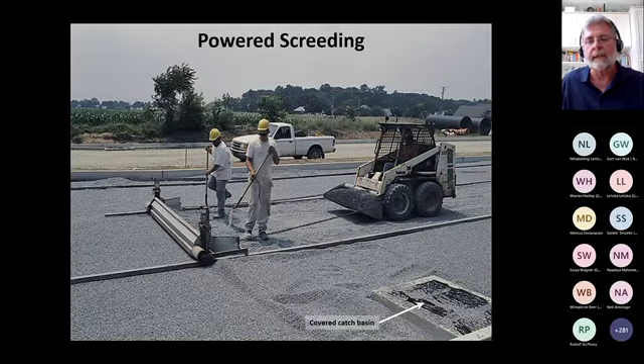I'm literally going to do this probably this weekend in my backyard. We can be power done, so we can have machine equipment pulling it. We can use small paving units that do this, but this is typically done manually, and it provides employment for folks, and can be done very easily and very quickly, keeping ahead of the people laying the paving stones.

Edge restraints, critical, absolutely critical. You do not build any permeable or non-permeable paver system, brick system, or grid system that does not have an edge restraint. Edge restraints can be anything from the metal L brackets you see on the left-hand side, top and bottom, for pedestrian applications like my driveway at my house. But if you have vehicular applications, typically we like to see curbs, whether precast or cast-in-place concrete curbs. Do not put any paver system up against asphalt directly without having a barrier between them, an edge restraint.

Asphalt's modulus gets really, really low in the summertime when it gets hot, and the permeable pavement system is very, very stiff. So you want something in between them to ensure that it maintains a system and that you don't have movement of the pavers. That is a bad thing to have happen.

If you can put your hand in and pull out a paver, that's a bad thing, bad construction. Making sure that everything is in straight lines, so we've got this guy adjusting it here to make sure we're meeting the specs. We're doing a mock-up of the system to make sure the contractors know how to lay the pavers in a continuous, uniform pattern. It looks better and it functions better. It's not a rocket science approach here to make this happen.

A lot of them in our neck of the woods now are being machine laid because our labor costs are high. A lot of people are doing machine laid, where you put a cubic or a square meter of pavers down using a piece of equipment. If you've got a giant area, like when you're doing an intermodal terminal, you want to try to do machine laid. But in most countries around the world, this is all manual laid, by a variety of people. I've done a bunch of work in South America, and a lot of them are laid by women doing work in their local city or town, as a make-work project for people too. Nothing wrong with that.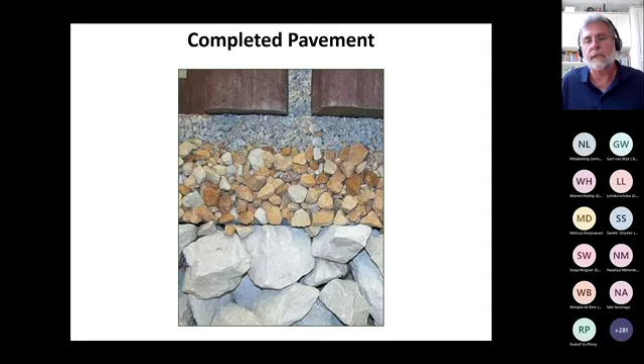So in this situation, we have now a properly constructed and built paving system that will allow load transfer and water to move through the system. This was intentionally done like this so we could take a picture behind some plexiglass to show you what it's supposed to look like at the end of the day.

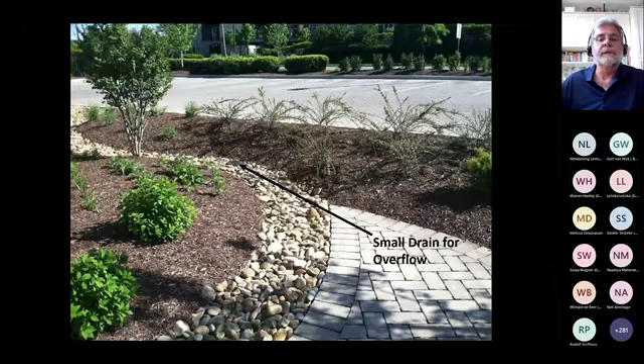If we have utilities and potential utility conflicts, some utilities get all angry when you get water near their utility, but they will bury it in the subgrade anyway. So sometimes we're asked to wrap our utilities in impermeable liners, for example, to help alleviate that situation. Again, we don't want the utilities to be in the pavement structure, and they should not be, but if they are, we've got to deal with it. So those are some of the basic things during construction.

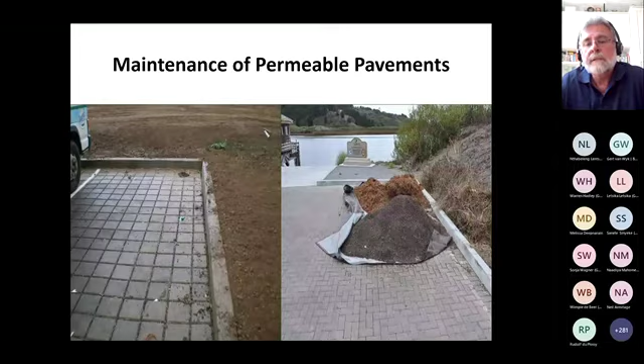Finishing up now with a bit of stuff on maintenance. I'm getting near my time, so I want to cover that and then hopefully allow for some more questions as well. Maintenance is something that certainly everybody's still working on, and it's something that we have good research on as well, in many different countries around the world.

I'm actually doing a project for the U.S. Federal Highway Administration right now to develop a new technical brief on permeable pavement design and construction. We've updated—I've got something like 1,000 references on permeable pavements now, of which 200 or 300 have been in the last 5 years. So we're updating some of that with newer techniques and technologies.

Ultimately, all pavements need maintenance, doesn't matter what it is. We seal cracks, we fix concrete spalls, we do things to the pavement, we clean them, we do patch repairs in asphalt and things like that. So all pavements need maintenance regardless. The only thing different with permeable pavements is that we want to ensure we maintain surface infiltration.

We typically specify most permeable pavements at 2,500—2.5 meters of permeability per hour. So if I have a permeable pavement and put a column of water up 2.5 meters tall, it will be gone in an hour, and so they're extremely permeable. We design them for 1/10 of that—something much, much less than that permeability.

We define infiltration as starting to be challenged when you get down to something like 250 millimeters per hour. That's still a huge amount of infiltration, more than the 100-year design storm anywhere in South Africa. So ultimately, we try to design for it first, then make sure we've got good subdrains and outflow to handle things. We've got test methodologies to inspect them and determine what needs to be done to fix pavers that may be damaged, and systems to evaluate surface clogging—you may still, and you probably will, get some stuff on the pavement surface.

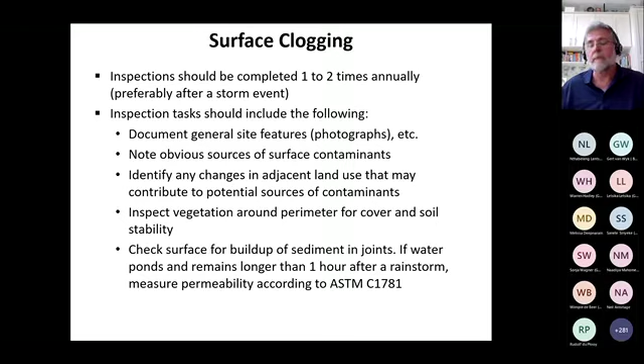There are ASTM international standards for permeable pavers in terms of measuring permeability. It's a simple pipe with some plumber's putty, and each of my engineers involved in this has a kit like this in their trunk. You've got a bucket with water, and you simply putty the pipe to the surface, dump water in, and measure how long it takes for it to go away. It's a standard little form, you've got a little Excel spreadsheet that calculates permeability, with a couple of little tweaks. You read the standard, you get this kit, and you can do the permeability testing as a no-brainer.

Cleaning the surface, there are lots of different ways to do it. These can be complicated and big pieces of equipment, which I'm showing you a few of on top. They can also be relatively simple, things you use around your house, like a shop vac or a billy goat, which is that thing on the bottom left-hand side.

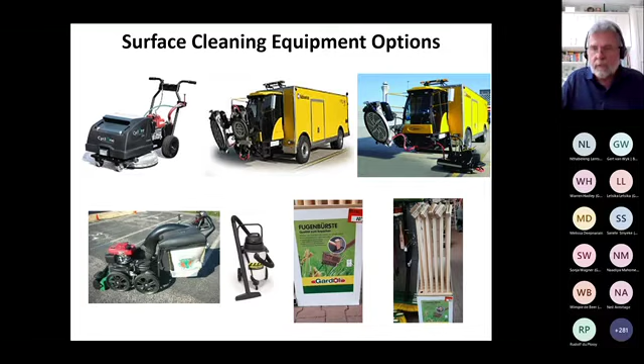The two pictures on the bottom right I took at the Bauhaus in Germany, where I was a month ago. They call them Fugenbürste - basically a wire brush on a stick - and you can literally go in and wipe the stuff off between your pavers. I took pictures of the advertisements there; Unkraut means weeds, and these are pieces of equipment you can buy for, I don't know, 60 or 70 euros, something like that. The little blade on a stick you see on the bottom is a weed remover, and for 20 euros you can buy one of these metal brush things that will actually clean the surface and get stuff out of the joints. There are lots of simple things that can be used - this does not have to be rocket science. That stick was, I think, 8 euros or something like that.

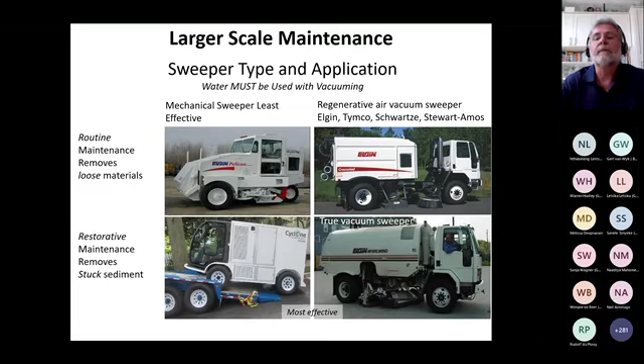Maintenance and repair of individual pavers - you can do this by removing them and replacing them if they're cracked. There are devices you can use for this, or quite frankly just two screwdrivers to pry the paver up. I've used that mostly myself to remove the first paver, and after that you just use a small crowbar to lift the pavers and remove them.

Usually when I work on a permeable pavement design project for a client, we incorporate a maintenance manual as part of the deliverables, and then we include a maintenance session, usually an hour and a half, where I provide many more details than I'm telling you here. I don't have time to spend that much on full maintenance here, but ultimately you get a written guideline and a training session on how to maintain permeable pavements, including doing utility repairs and patch repairs for settlements, all along with step-by-step instructions.

This is what you do first, next thing you do, next thing you do, next thing you do. So that kind of guidance is also available out there.

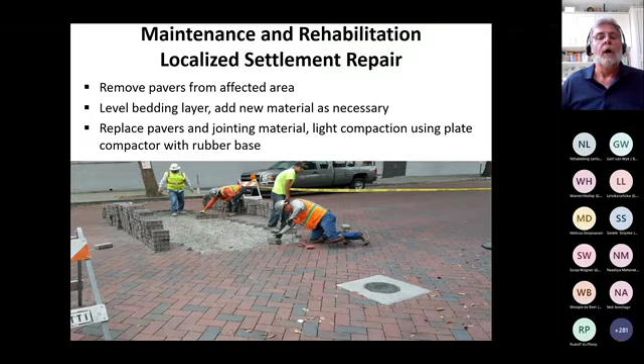So this is basically the repair process. Remove the first one, then remove the areas in the repair, screed and do your utility repair or whatever it is you wanted to do. Screed the material properly, nice and flat after you've done your repairs.

And we talk about reusing some of the excavated materials. We talk about using things like control density backfill for small repairs and all kinds of more details. Again, I can't go through all those today.

But then once you've done this, you put your screed rails in here. Those are manual - lengths of pipe with the right diameter to give you your 40 to 50 millimeter screed. You put your aggregate down on top of them, make sure it's all nice and well placed, and then you screed over top of the rails. This guy's using a piece of wood lumber to do that.

You remove the rails, and you simply fill in the spaces where the rails were. In this case, they're using a trowel, a hand trowel, to make that happen. You clean out the layers beside them.

These guys did not use an edge restraint because they were being very careful to keep equipment away from the edge. Sometimes we put a temporary edge restraint against the pavers that we don't remove to make sure that they don't migrate. We don't want the joints opening up on those locations, because if they start to migrate, you're not going to be able to fit all the pavers back that you took out, which is a bad thing.

You can't do that. So then we've got our guy putting them back in, individual pavers, just like putting them in, small tap hammer, making sure they're straight in line, making sure they're on the nicely screeded surface. They've got a straight line that they put in there, so they can measure them against that straight line.

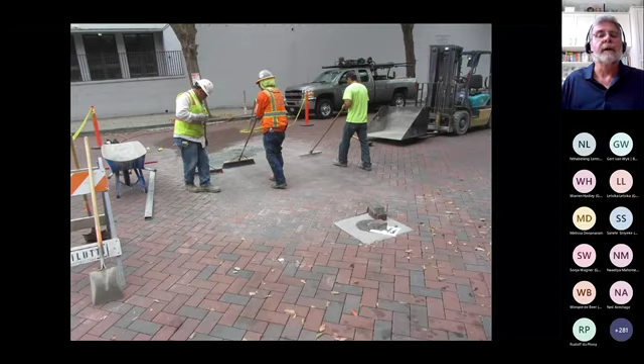And then after finishing the whole thing up, getting it completed, we've got our final surface, and ultimately you can see the repaired surface versus the original surface without any difference between the two. It looks a little bit dirty now because they just finished it, and I didn't want to put water on it - it hasn't rained or anything like that. But ultimately, you're unzipping the pavement, you're zipping the pavement back up, and nobody knew you were there.

And so that also provides a significant cost advantage over hard surface pavements like asphalt and concrete as well, because you can do that very simply and easily with almost no equipment.

The key is to make sure you don't let the edges migrate inwards. So I would take a small L bracket with a long spike in it and put the L bracket up against the pavers that haven't been removed, nail it in so that when you're doing your construction work and doing your excavation for your utility repair or your settlement repair, whatever it was, you don't let them migrate. Pull them up before you put the pavers down, and then you're off to the races. So it's really, really simple to do.

So utility restoration guidelines, I mentioned already, this is just a short version of it - basically making sure that you don't have debris and stuff in the holes and keep away the materials from the excavated edge. How you remove the materials. If you're close to a curb, take out all the pavers.

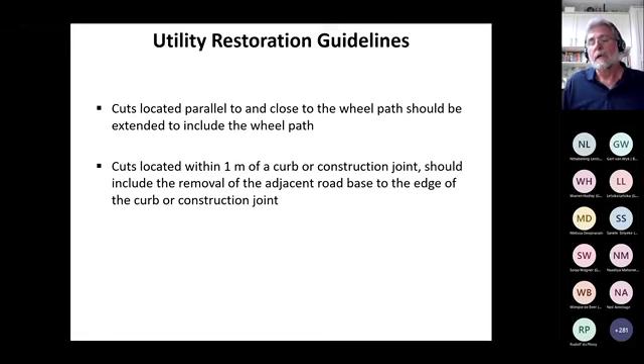Good guidance is available in the manuals, particularly for an agency that's going to do their own maintenance, or for potential maintenance contractors. Since so many more permeable pavements have been built in North America and Europe, there are now contractors that specialize in this kind of maintenance, doing restorative maintenance for clogging and things like that as part of their business operations.

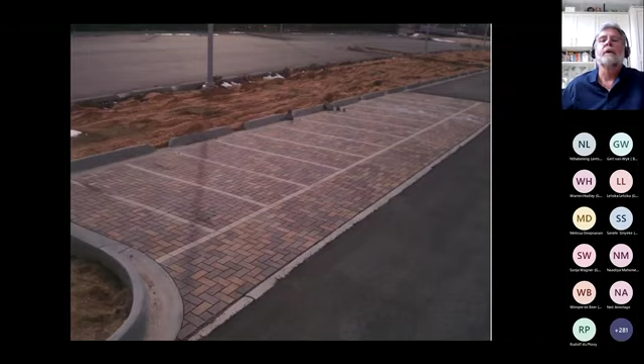To maximize the effective life of permeable pavements, limit things like standing vehicles that leak oil or engine fluids onto the pavement. It's not the end of the world—there are microbes in the pavement that break down oils. There are also geosynthetic materials that claim to break down hydrocarbons, but the disadvantage is you have to put them in the upper layers of the permeable pavement, and I don't like that because they can become a built-in clogging layer. I'd prefer they be lower in the pavement structure if you're going to use those geosynthetics.

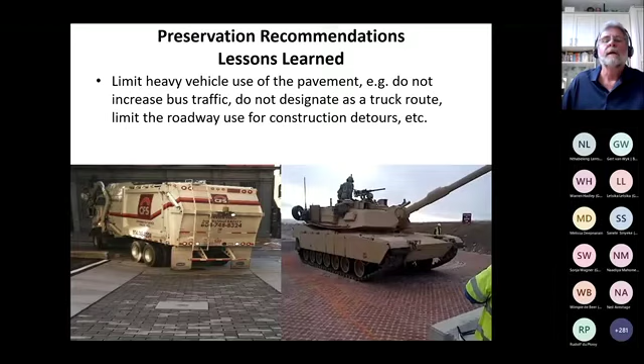Keep things away from the area around it that could cause clogging. Like I mentioned, new construction with a concrete truck cleaning its materials on our site was a no-no. Limit heavy vehicle use on permeable pavements—we built them to handle occasional load applications of heavy vehicles. The one on the left I took in Richmond, Virginia, where I watched a truck drive down the permeable alleyway; it deflected the pavement, which came right back to where it was supposed to be—elastic, which was awesome. There are applications we've built for super heavy loads, large vehicles, and mining vehicles, but don't do that unless you understand the basic concepts and have the tools to design it.

Finally, education is important. People try power washing the pavement surface to clean it, and they remove the aggregates. If you're going to replace the aggregates, that's perfectly fine. But if you're not going to replace them, don't get too shallow or too strong on the power wash so that it removes the entire aggregate from the pavement system. Again, if you're going to replace the aggregate it doesn't matter, but don't take the stones out unless you're planning on putting them back in.

This is one of my favorite ones, from Northern Ontario, about 2 to 2.5 hours drive north of where I am on the Great Lakes. This is a national underwater marine park, and all of the parking areas and pathways are permeable pavement because this water is the cleanest you'll find anywhere. We don't want things being washed into the lakes up there, because we have three-quarters of the world's fresh water very close to where I sit right now.

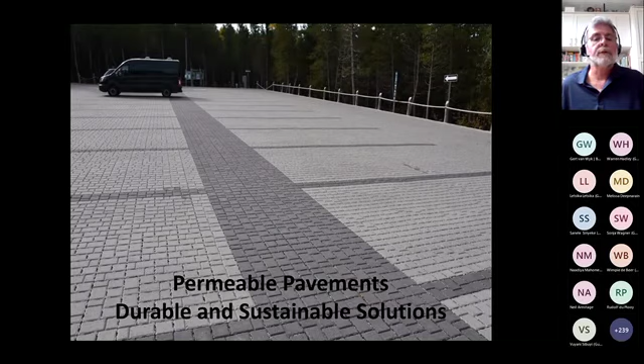Yes, Dave, we had a few questions. Sure, a lot of it's got to do with maintenance and life.

What's the expected life of a permeable pavement? What can you design it for? Typically, we design it like we would normal pavements, for 20 or 30 years. So that's the initial service life. It doesn't matter what the pavement is, asphalt, concrete, whatever, you're going to end up probably having to replace some units, it might be cracked, things like that. So we intentionally design the pavement structurally for 30 years, that's about the structural capacity and the traffic you have on it.

In terms of clogging, that very much depends on the location of your permeable pavement. I've got some that were designed underneath roofs of porte cocheres that'll never see anything clogged on it, and they'll last forever pretty much because there's no chance of clogging those. For others, we design it in situ for 1/10, actually almost 1/100, of its initial permeability. So we're assuming that we're going to get clogging in areas, and that the entire surface is not going to clog. Water will find a place - if it can't get in one place, it'll go find another.

Quite frankly, the best way to inspect whether your pavement is functioning hydrologically is to take an umbrella and go out when it's raining and see if the water's going away. If the water's going away, that's your inspection - you're done, that's the only tool you need. If you need to do actual testing, like I showed you, we encourage that when it gets below about 250 millimeters per hour of permeability. And that still is a huge amount of permeability.